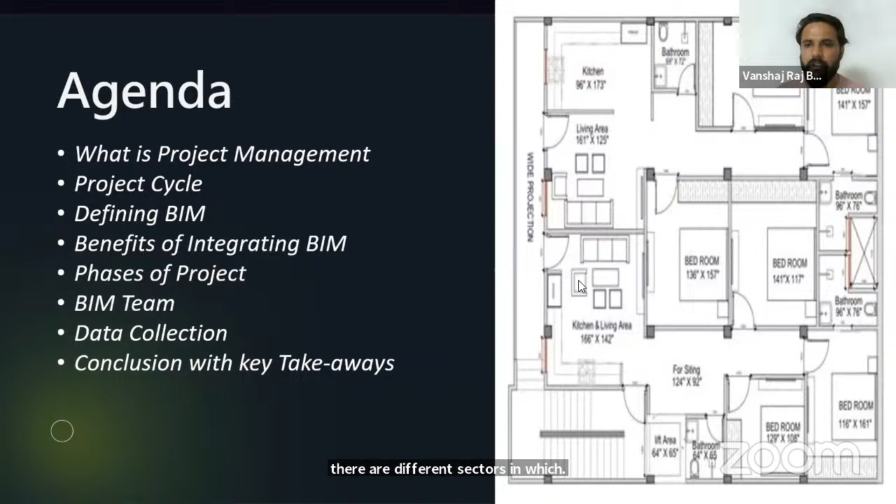Then the BIM team - what team we should have depending upon the project, how we can define the team for BIM. Then data collection - how BIM helps us collect data for projects through modeling software, as there are different sectors in which BIM works. Conclusion, then last will be the key takeaways - what are the main takeaways from using BIM in the project lifecycle.

So I'll start with what is project management. When we talk about project management, there is a manager doing a certain thing with particular processes and systems - that is called management. And when we are managing a project, we call it project management.

How one project works around this triangle - if you can see the triangle on the screen, that is the project triangle. So a complete project runs around these terms: cost management, time management, scope management. These are directly proportional to each other.

For example, there's a residential project working on. We have a fixed cost budget in mind. On the basis of cost, we'll plan the scope, like what all scope it will include in the same cost budget. Then, to execute the same scope, we determine what time it will take - that is time management.

So cost, time, and scope are the three things which are directly proportional when we are managing a particular type of project, while keeping the best quality out of it - ensuring that whatever we execute at site and whatever processes we work on have good quality, meeting the standards of our construction practices.

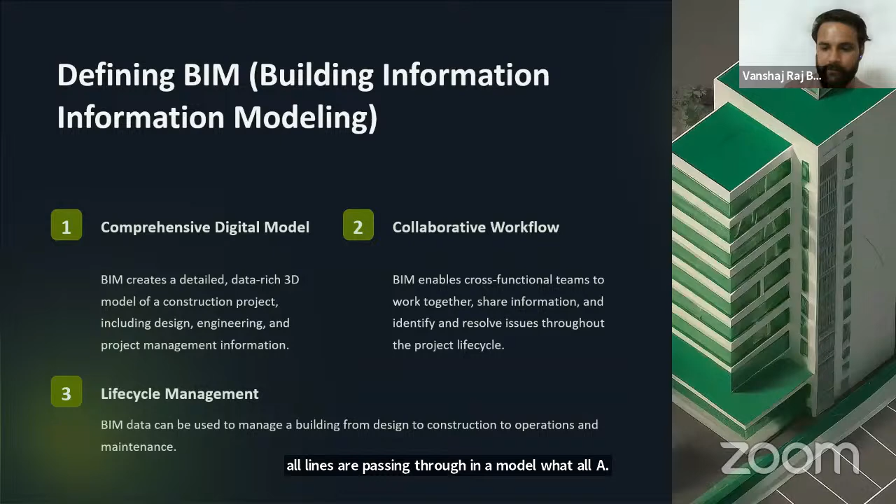Next is benefits of integrating BIM into project management. Benefits of integrating BIM are, as I mentioned earlier, improved coordination.

What happens is, the architect draws their own 2D layouts at their office. The structural consultant draws the layout of the project from their own office. The MEPF consultant makes their own layouts and piping sections from their own office. So BIM helps us coordinate - if the architect is drawing their 2D drawings at their office, it will come into a complete phase model. With the help of BIM, we can collaborate all the works, and it helps improve the coordination between all the stakeholders.

Cost saving - how is it cost saving? Because with the help of BIM, we can have the accurate cost for each and every item we are using in the project. For example, if there's a brick wall, with BIM modeling, by clicking on the wall, we can get the complete area, what all bricks are needed, the complete area for the project, and how we can calculate the quantity.

For example, there's a brick wall, and after brickwork there's finishing like plastering work, then putty work or tiling work, or wooden cladding work. There are different sets of work, structural work. We can mention them all in BIM, and with the help of Navisworks, we can extract the quantities for each and every item, which gives us the quantity of work to be executed. As per the standard cost or DSR rates, we can have the total cost value in front of us.

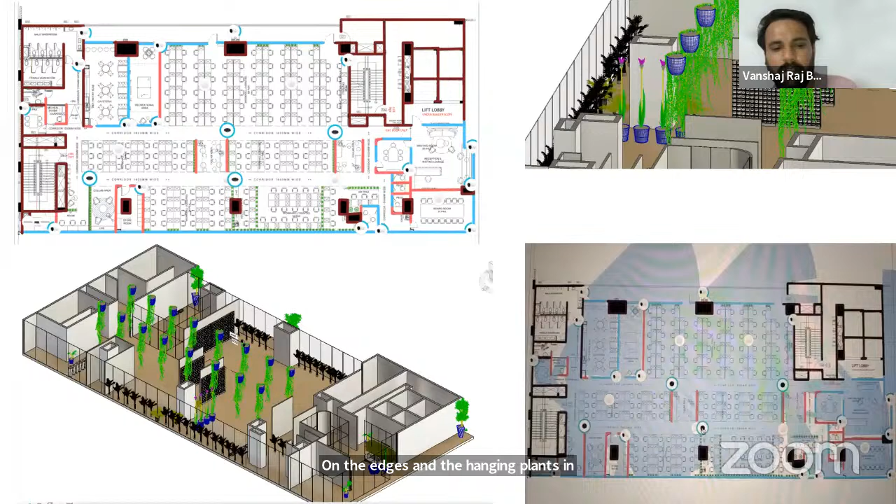In Revit there are n number of families which we can add and present, like a particular type of bed if we want in the wall, particular beds in the rooms. We can have a wardrobe, show our sofa lining, center table, and wardrobes, whatever we are planning. This is part of the modeling.

When the modeling is done and everything is set, we have to prepare the BOQ, the cost estimate for the complete project, so we have an idea what all things we're using. By just clicking on the items, we can extract the quantities.

If I just click on the bed and extract the quantity, I will have the dimensions of the bed, the complete area it is occupying, and the area of wood used in the bed. It can all be extracted from the BIM model.

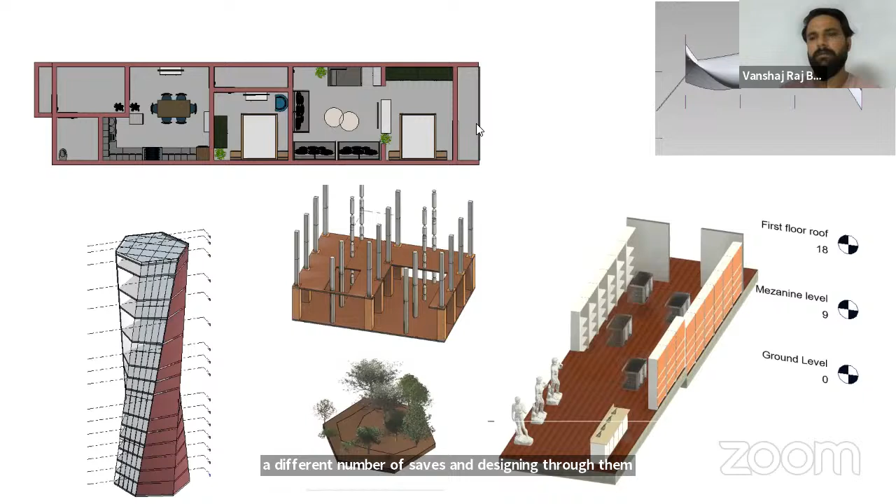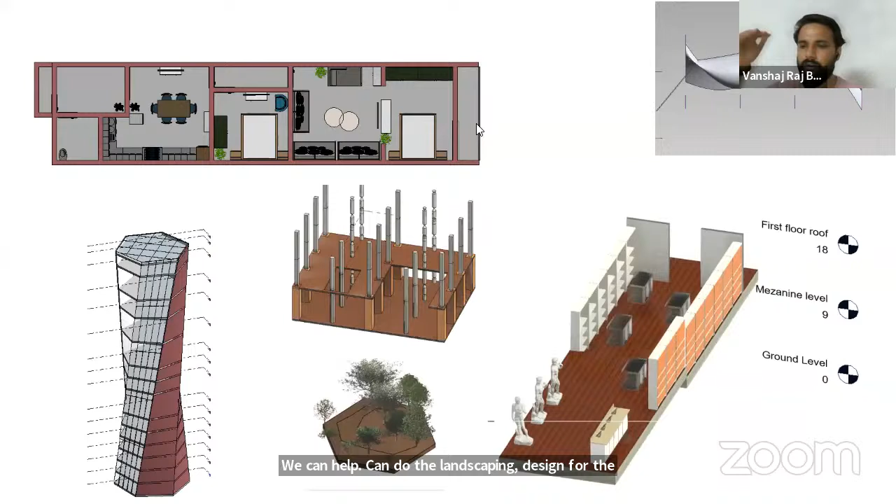We can make n number of shapes. We can plant trees and do landscaping design for the complete projects. We can define certain numbers of levels for the project, and add floor finishes in Revit, which helps us calculate the final exact quantities for the complete project.

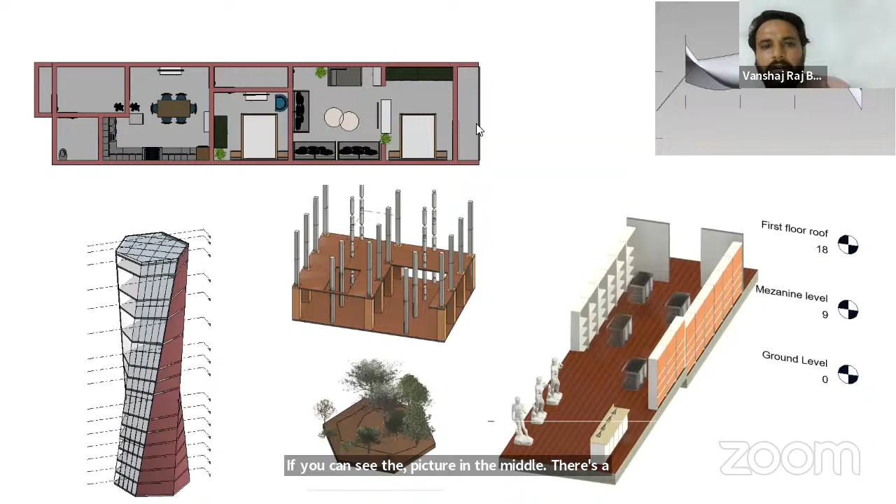We can also add different shapes of columns. If you can see the picture in the middle, there's a different shape column. We can do modification in columns and also extract quantities through it.

Conclusion and key takeaways. First is improved efficiency. BIM streamlines project management processes and reduces waste. So how is it efficient? As I said, we already have all the models and clashes already detected.

We have final GFC drawings to work on the project, so we have a hindrance-free project. We can execute the works on site without any hindrance, like not having drawings. What happens when we are working on a site? We are waiting for approval on drawings from the architect, or if there are any changes, we have to wait till those changes are shared by the architect and approved. So BIM helps us in already closing these details before the start of the project.

So we can have improved efficiency, we can save our cost, and there is no wastage of manpower. If manpower started working, they'll only move when they have completed their work. So there will be no hindrance or stoppage of work if we're implementing BIM in our projects.

Second is enhanced collaboration. BIM can help us collaborate with all the stakeholders at one place, and it can help us create the complete project plan and teamwork plan, and share information with different stakeholders. It helps in informed decision making across the complete project life cycle, from initial to final handover. So integrating BIM into project management can deliver significant benefits in terms of cost saving, construction efficiency, and overall project success.